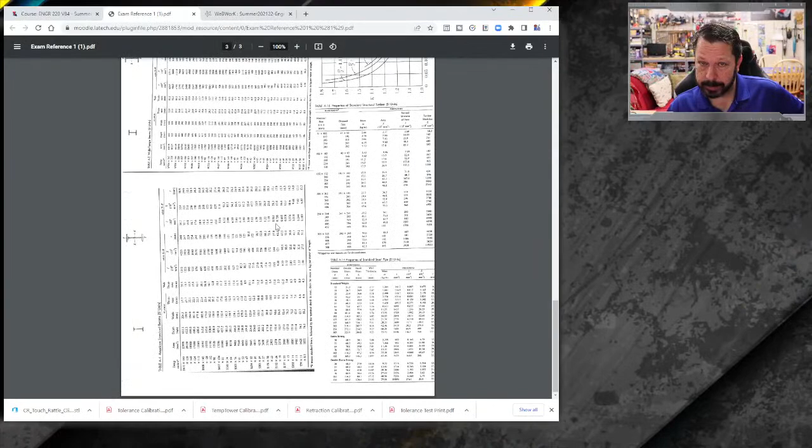One of the things you asked about was reference material. These PDFs right here are exam references. Most of this we don't need for exam 1 because these references are for exams 1, 2, and 3. So you might need this page right here.

Rotate the wrong way. But see, here's your material properties, so you can get your material properties you might need. You can use that exam reference.

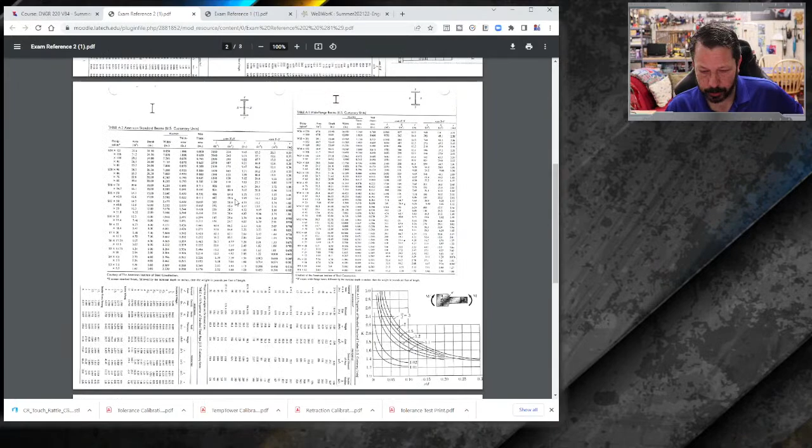Exam reference 2 is the same thing, just a different set of stuff. It has the centroids in there probably somewhere. There they are. So if you don't remember a centroid equation, they're all in there. But don't worry that a lot of this doesn't make sense, it's for later.

That's the reference material: exam 1 reference, exam 2 reference. Let's see what I put in here - this is practice for exam 1. I'm currently on class 10, the actual exam class.

Usually there's some old practice exams. Yeah, these are retired problems. If you want to see some old problems, not going to necessarily repeat these problems, but you can kind of see what some of the older ones look like. Now these are from 2006, 2007. I don't know how old this one is. Let's see what it looks like.

2009. So these are older test questions, but you can get an idea of the kinds of things that will be on an exam. These aren't necessarily complete exams, they're just pieces of exams. So you can practice with those also if you want more practice problems.

I don't know that those have answers. Some might not.

This is just reminding you that this optional 1 that we're going to work on today is going to give you extra practice for exam 1. Challenge 1 also does that, but it also gives you extra credit for homework.

You can also have a calculator, obviously. But other than that, you'll have your calculator, exam 1 reference, exam 2 reference, and the exam itself, and that's pretty much all you'll have. Paper to write on, and then you'll have your phone ready to take pictures.

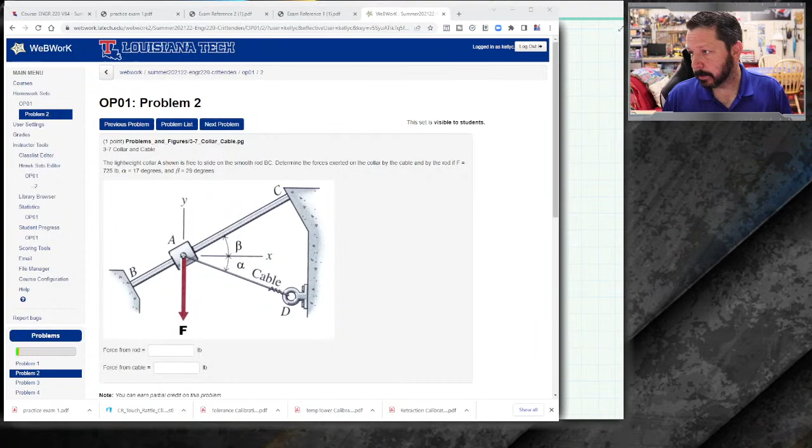All right, let's see, y'all can not see that. There we go. All right, so we've got this little collar. It says lightweight collar here, meaning we don't have to worry about the weight of the collar itself. Some situations that might be important, but lightweight is our key word that we can ignore the weight of it. It is free to slide on this rod BC. What that's telling us, the free part, means we don't have to worry about friction between the collar at A and rod BC. Determine the forces exerted on the collar by the cable, and by the rod if the force of this red arrow is 725 pounds, alpha is 17 degrees, and beta is 29 degrees.

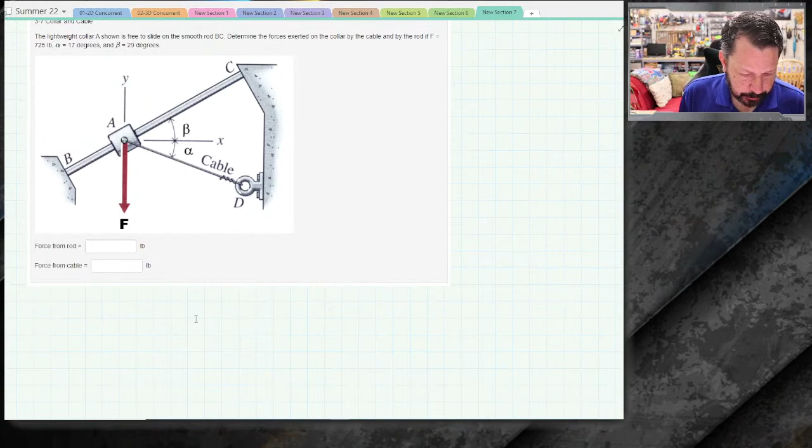So what we want to do with this is go down here and draw a little free body diagram. Actually, we'll draw it on top of here, and then we'll copy it down. We're basically wanting to worry about this little, what they call it, collar. And I'm just going to kind of draw the collar. And then the collar has this force F, which is 725 pounds for me.

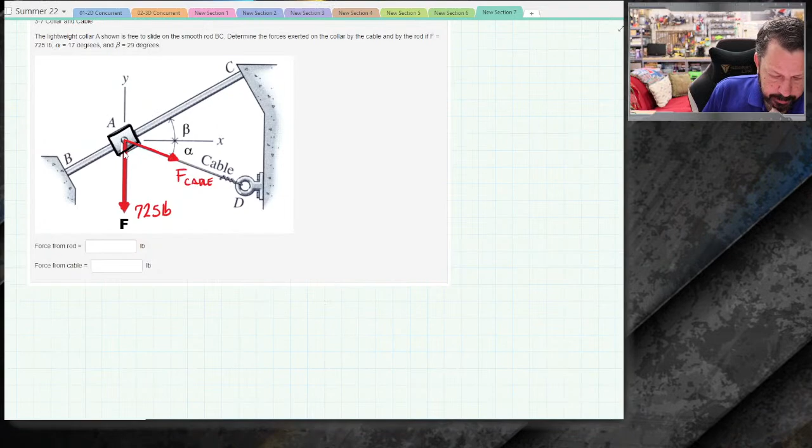It has a force from the cable here. We don't know that one, so it's just F cable. I'll probably call it FC in the end. We have a couple of angles here, so let's put a coordinate system right here at our origin. This one's a concurrent force system, so that's usually the best place to put it. In fact, there was already an X and Y axis there. We've got this angle alpha for me is 17 degrees. It's all getting cluttery, but we're going to move it in a second. Beta is 29 degrees. And the force between the collar - you have to kind of figure out what this collar is doing. It says it's free to slide, so there's no force in direction BC.

Collars, we haven't really talked about those yet. We talked about pins, we talked about rollers, but collars are a lot like rollers. The idea is that they constrain motion in one direction. So it's free to move in direction BC along this rod, but it's not free to move perpendicular to that.

When it means it's not free to move in one direction, that means there's something resisting that movement. So there's some kind of normal force here, we'll call it Fn, some kind of normal force inside the collar that's between the collar and the rod. We don't know what it is. In fact, it's called the force from the rod, so we don't know what that equals.

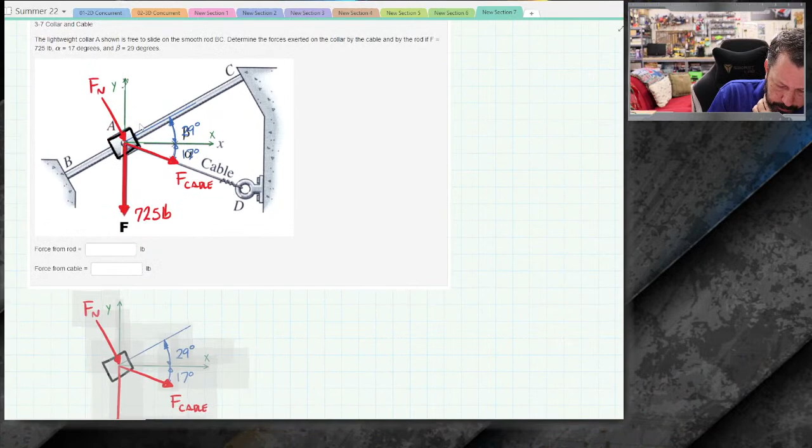Let's put another little line up here. I notice I've got to put that line, and so that's going to actually do more like that. Let's see if we can copy all of that little stuff. Move it down here. All right, so there's our little free body diagram that we're dealing with.

We have two unknown forces. I've got them kind of going in the same direction here, so that's not going to work. Something's going to have to give. Maybe I could fix that and move Fn to where it points up and to the left. That might be a good thing to do since it's obvious it can't go this way. If it's not obvious it can't go that way, that's fine, you just leave it. When you solve it, you'll just get a negative number and know you drew that arrow the wrong way. Now I've got something that pretty much looks like any other 2D concurrent force system that I've already solved.

So Fn is kind of unlabeled, but I do know it's the normal force between the collar and the rod. Normal meaning perpendicular, so I do know that this little guy is a 90-degree angle. So I know that this angle is 29 degrees, right, just based on the rod being rotated 29 degrees, so perpendicular to that has to be rotated 29 degrees also.

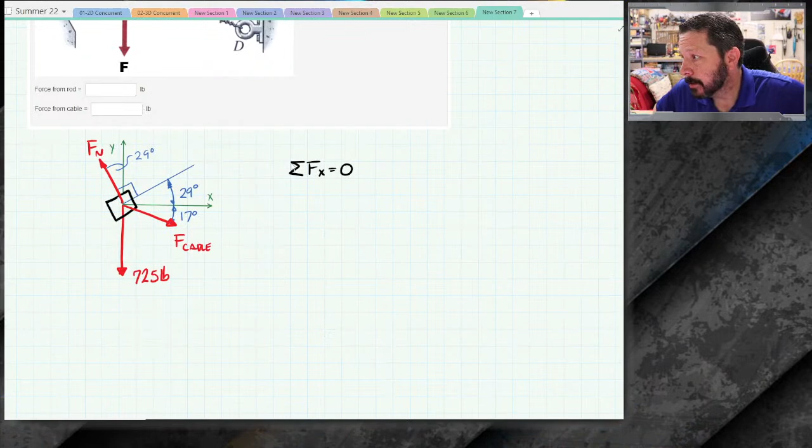Now I've got a simple setup where I can write some equilibrium equations. This is 2D concurrent forces, so I only have two equations, x and y. Both my unknowns have unknown values in x and y, so I'm going to have to write both equations and solve them simultaneously. For exam 1, I would expect that you're going to need to solve something simultaneously, either one of these 2D systems or one of the 3D systems, or both.

So you do need to have a way. You're not going to have MathCAD, even though you're on your computer, you only have Moodle. So you're not going to have MathCAD, and so you've got to use your calculator. Make sure you know an effective way to use your calculator to solve systems of at least 3 unknowns, because there's probably a 3D concurrent force system on exam 1. And there'll certainly be a 2D one, if not a 3D one, but I would expect to have a 3D one.

All right, so what this says is the force in the cable, times only the x component of it, so cosine 17 degrees, minus the force, the normal force between the collar and the rod, times the sine of 29 degrees, equals 0. I can't solve that equation, it has two unknowns, but I can write another equation.

In the y direction, because I have two equilibrium equations, I know this collar isn't moving in x or y. It's not translating in either of those, so these two directions have to add to 0. X has to add to 0, and y has to add to 0. I'm going to write them in the same order just to make it line up.

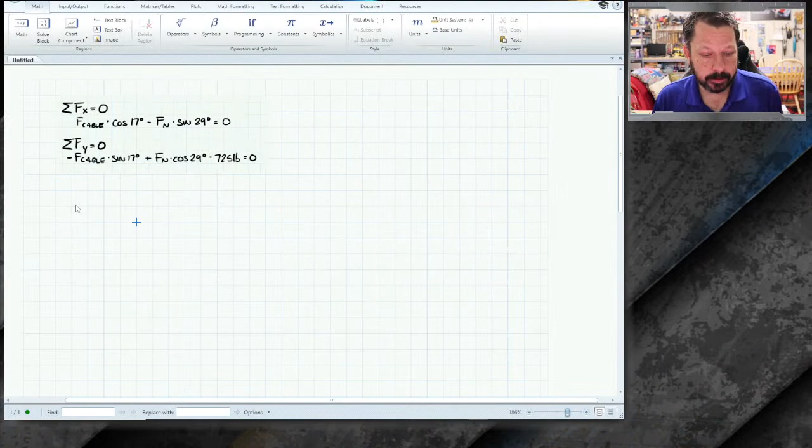What I'm going to do is copy this little guy right here. I'm going to go over to MathCAD. We're in MathCAD, paste it. It's going to be gigantic, we'll make it a little smaller, and we'll just throw this in a solve block and solve it over here. Again, not what you can do on exam 1, but you can do it other times.

I'm going to call this force cable equals 1 pound, and force n - I'm not using subscripts, it's just a lowercase n. Our constraints are that force of the cable times cosine of 17 - got to tell MathCAD that it's degrees.

Minus Fn times sine 29 degrees. Control equals all of this thing. Control equals, to do a symbolic equals equation, 0 equals 0. I probably need to put 0 pound force on that. I'm not certain about that, we'll see. Negative F cable times, sine of 17 degrees, plus Fn times the cosine of 29 degrees. All of that. When I move the 725, it'll become positive pound force.

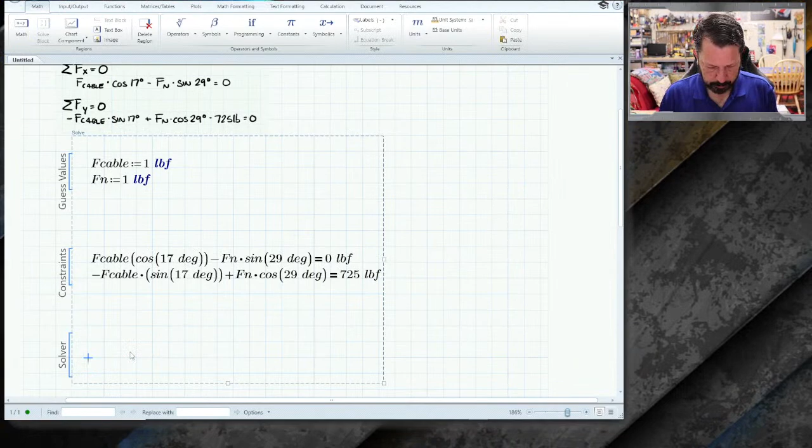Why are we having trouble? I just want to find F cable. Oh, do I have to do it this way? Answer 1 equals find F cable. Nope, what am I doing? I did Fn, I did those as symbolic equals equations. Did that, that's the problem.

Why do I have extra parentheses around these, I wonder? Keep typing it as a lowercase. Huh, not sure why it doesn't want to solve these. No solution was found.

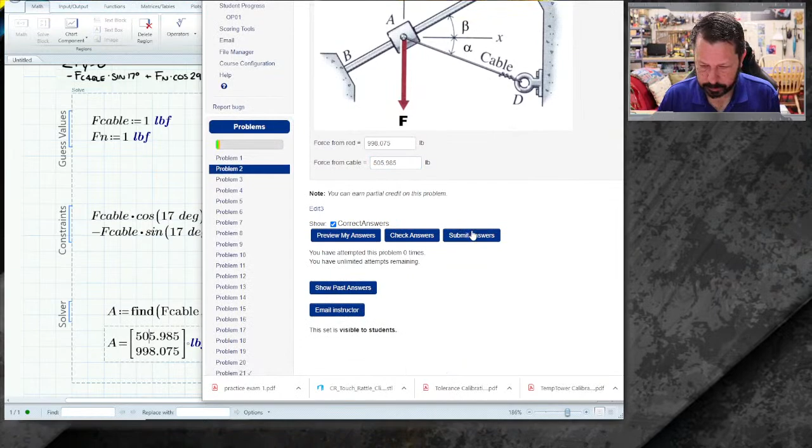I could definitely see this problem being something you would do as a medium level one. It's not like a one-liner, you've got a simultaneous set of equations. You got to draw this free body diagram, you got to think through. So this would be more of a medium level problem, not one of the easy ones.

But I could see this being a thing you could do on the exam as one of the actually a little bit tough problems because of the simultaneous equations you have to do. There's not another way to do it, and it takes a little bit of time to set up the equation, check it, do it, get it right. So I could see this one being on the exam, but one of the not hard problems, but upper level problems, something that separates maybe a B from a C. Maybe not one that separates an A from a B, but maybe separates a B from a C.

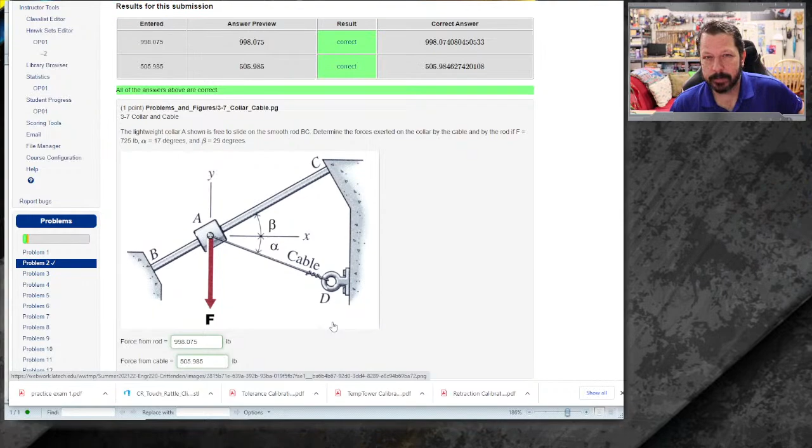It's just lengthy, and that's probably kind of the thing you can expect on the exam, is if there's a 3D concurrent force system, it's not that they're complicated, it's just that they're lengthy. And so they do count as one of the harder problems just for the length that they are. This would be a good one to work through. It says the same thing, the origin is over here, but the concurrent point is at A. So this would be another one.

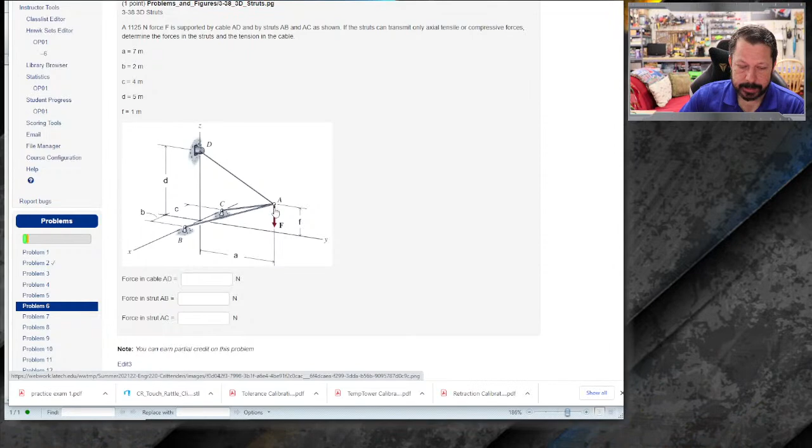If we have time at the end, we'll come back and do one of these, but they're a small portion of the exam, so I don't want to take a bunch of our time here just doing these. But if there's time at the end, then we'll go back and do this, but they're a pretty relatively small portion of the exam. So let's find, all right, this one's a good one. Let's copy this guy, and let's go to here.

All right, so here now we're in the mechanics type of stuff. This other stuff was all statics, right? So now this is in the mechanics stuff.

I've got two strips of plastic material, bonded together as shown. So the two strips they're talking about are this piece and this piece, and they're bonded together with these top and bottom pieces, maybe pieces of tape, just really thick, drawn pieces of tape.

The average shear stress in the glue - so the glue is on these pieces of tape. I'll try and draw it, but it's kind of on the top side, right here and right here. So there's glue in those green spaces between the top and the two little yellow plates, and there's also on the bottom, but I can't draw that without just coloring over where I already colored. But the shear stress in the glue is limited to 990 kilopascals, so that's your shear strength for this glue.

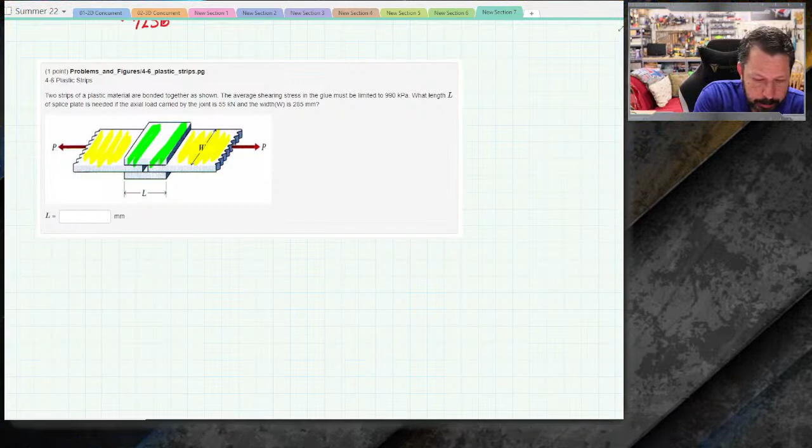What length L of a splice plate - so the splice plates are the two little plates on top and bottom, the ones in the middle - how much is needed if the axial load carried by the joint, that's P, is 55,000 newtons. And the width, they give us the width W as 285 millimeters.

This is a pretty good one. I don't think this counts as a super easy one, but it's pretty much on the separate a C from a D kind of level.

You do not have to draw free body diagrams to get credit unless the problem specifically says draw the free body diagram. It will help you, but it's not going to be graded unless the problem specifically says so. That being said, it's usually best to draw a diagram because if that problem happens to be one I'm looking at for partial credit, that free body diagram would be some of that partial credit. So let's say you don't know how to do the problem at all, but you draw the free body diagram correctly, and that's a partial credit problem I'm looking at. I don't look at every one of them as partial credit - some are too straightforward to really have partial credit. But if I see your work and like, oh, he's got the free body diagram correct, just didn't do the math right or didn't set up the equations, then you at least get something for it.

So here's what I'm going to do for a free body diagram. I'm going to take the little yellow piece on the right, and I'm just going to draw a side view of it. Let's just do this. Now this is larger than what they've drawn, but whatever. Here is the 55,000 newtons.

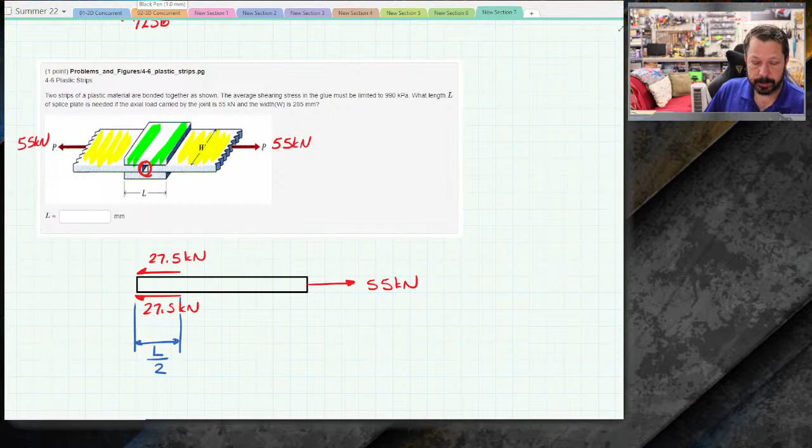So we do know it's a shear just based on the problem statement. Not every problem is going to tell you normal stress or shear stress - it's not going to always give you that clue in the problem statement. This one does, but make sure you know that you can look at a picture like this and tell that it's a shear stress versus a normal stress. You tell by looking at the force you're dealing with in your stress equation and the area that force acts on. If the force and area are perpendicular, then it's a normal stress because they're normal to one another. If they are not perpendicular, if they're parallel - which is how they're going to be in our pictures here - if they're parallel, the force and the area that force acts on, then it's a shear stress.

So I've got tau, that's shear stress, equals V, shear force, over the area the shear force acts on. They limit tau in the problem statement to 990,000 pascals. I'm going to do it this way so I don't get mixed up on my thousands somewhere.

Although my forces are in thousands of newtons also, so we probably could drop it off and it'd be fine. The total shear force is 55,000 newtons—that's 27.5 on top, 27.5 on bottom, added together. The area those two shear forces act on, there's two of them, one on top and one on bottom, so 2, and they have a width of L over 2.

And a thickness into the screen of 0.285 meters. So I converted everything over to my base units. You don't have to do that, but you might get confused and be off by a factor of 10 or 100 or 1,000 if you don't convert them all to the same correct units and you're not careful. So I just convert them all to the base units. All right, let's see if we can make this solve here.

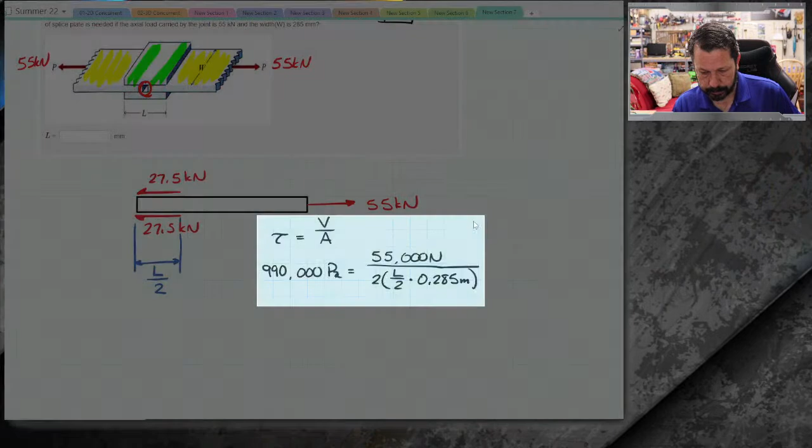L is what we want to solve for. Let's see if MathCAD can do that. I don't know. All right, so we'll just grab this guy. I wish MathCAD could just take the picture and figure out what I'm asking it, but I don't know that it can do that.

But we can put this equation into MathCAD with a symbolic equal sign. Newtons, whoops, over 2 times L over 2 times 0.285 meters.

Now, I'm not as good with this version of MathCAD, so we'll have to see. I want to do the solve. Maybe I need to do the whole equation. Well, it won't let me do that. Solve for L. Got a weird number here.

Newtons over meter pascals. All right, we have to figure out if that's the right set of units because that's weird. First of all, did I put everything? These are not the—well, that has units built into it. That's newtons, pascals. All right, so a newton, meter, pascal. Let's see if that's the right units because I want L to be in meters, right?

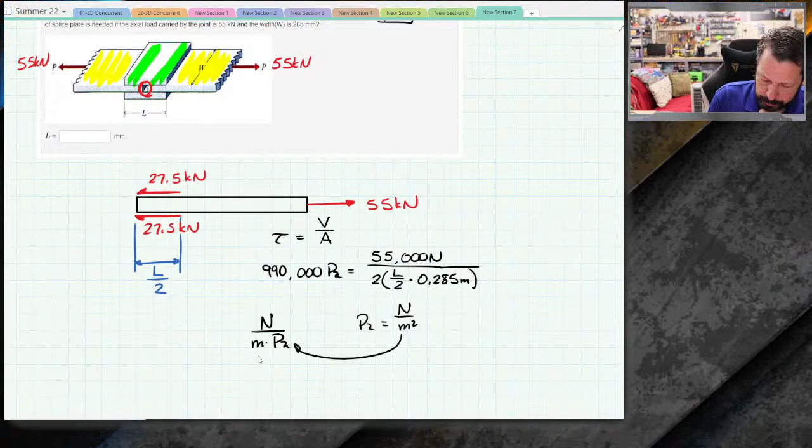So let's see, what was it? Newton over meter pascal. A pascal is, remember you calculate pascal as force over area, so it's a newton per meter squared. So if I have that plugged into there, then I have a newton over a meter times a newton per meter squared. Newtons cancel out, this cancels one of those out, and that turns into meter. So that is the right unit.

Not sure why MathCAD thought it was best to put it this way. So, 0.19493 meters. Let's find our little deal here, and this guy. All right, 0.1949 meters. It wants it in millimeters, so that's going to be 194.93, 94 for the total L, right? Yes, we got it right. All right, so that's a decent one for a simpler level problem, but not too simple.

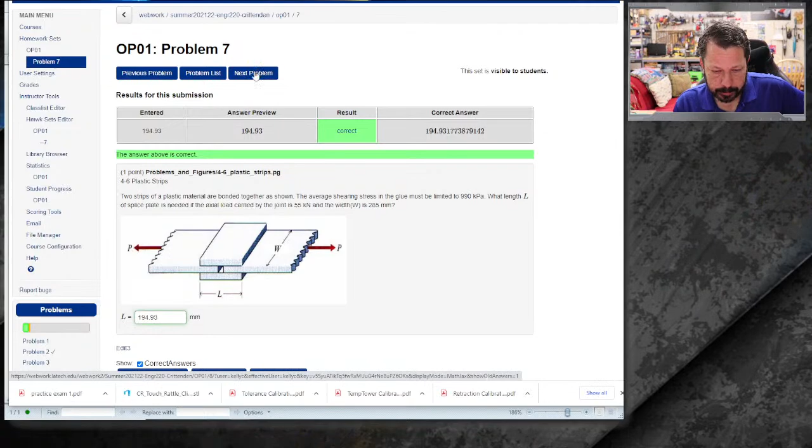There's a little bit of figuring out how to go about solving this one, but that would be kind of a design problem even, because you're figuring out based on your material strength, the strength of this glue, you're trying to figure out how much glue you need basically. So that's an interesting problem. Let's find us another one.

This thing, this one has a lot of good ones. I don't want to work through all of them, but this one, if you kind of want to practice all of your stress stuff at one time, go solve this problem because it's got all of your bearing stress, shear stress, normal stress, tear-out stress. They're all in this one problem.

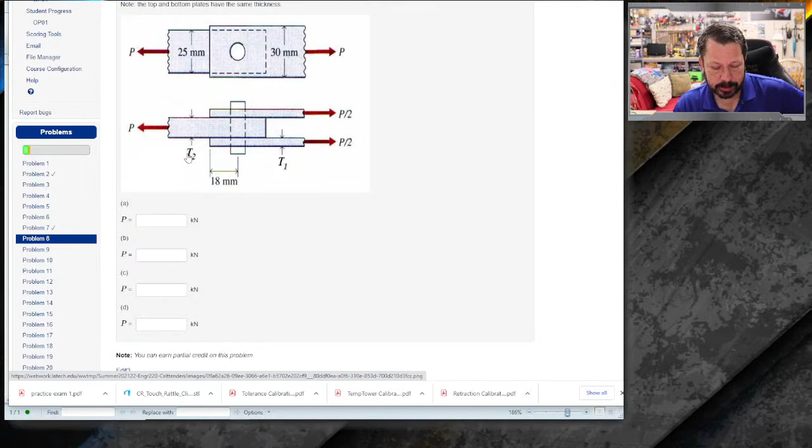So it is a good one to practice. This is optional problem 8. That's a good one. There won't necessarily be—I can't think if there is. I don't think there's a problem on the exam where you have one problem that has like a bunch of answers like this one. It would probably be broken into 4 different problems, but I can't recall if that's true or not on this exam. I'll have to look at it. I haven't looked at it recently.

Again, this might be one we come back to, but this would be a good one for you to practice. We basically did this one with the squirrels, right? We should do this one just because it's a different thing. This one counts as one of the pretty straightforward ones, but we haven't done this one or one like this, I don't believe, so we'll do one.

Also, where's today? Exam 1 review. I did an exam review last year where I did the same kind of thing, and I might have picked out different problems. So you can look at this one and see what problems I did back there, and it might give you even more review. I might have picked some of the same problems, though. I don't know, I surely don't pick them all exactly the same.

All right, so this one is a shear strain problem. I've got the rubber mounts, which are the pink parts on this picture. They're used to isolate vibrational motion. We're not worried so much about frequency of motion in this part, we're just thinking of the shear strain.

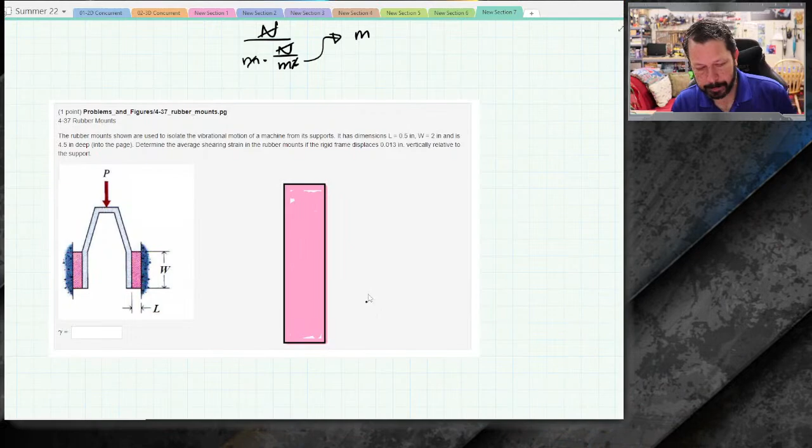Now it is attached to where it doesn't move, to a wall over here, so this side doesn't move. But the left-hand side of this thing is attached to this little upside-down U-shaped bracket, and it moves up and down. In our case here, we're looking at one instance in time where it's pushed down.

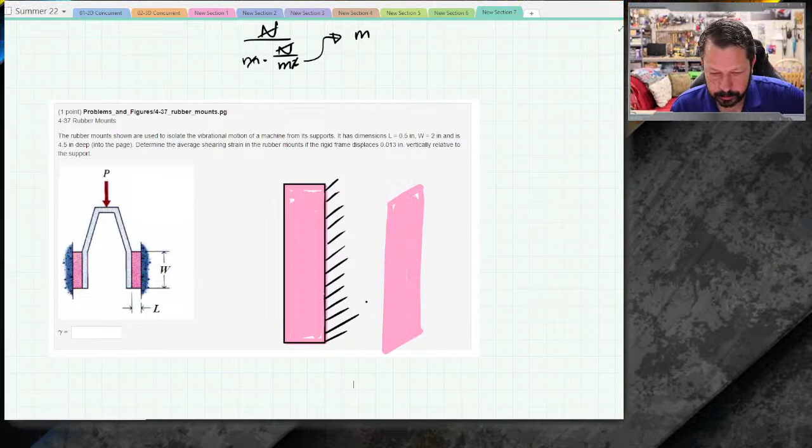So instead of this shape, let's draw another one. Where are those little pink... There we go, I don't know if I'll get this one very well, but this is the second state for it. It's kind of like this, and we'll try and do this. I don't know, no real point to it, I just want to do it. Oh, it goes that way. All right.

Want to... why can I not? There it goes. Oh, it doesn't let me skew it much. Oh well, that's no good, we'll just draw it by hand. So it skews over like this, and this part is still attached to the wall.

So the shear strain is that angle, gamma. That's all it's asking you to do, is calculate that angle gamma. And they tell you in the problem statement that basically this point moved down, for me it was 0.013 inches. They also tell me that this length is 1/2 inch. They also tell me W, but I don't need W.

So to calculate gamma, it's just tangent of gamma equals the opposite side, 0.013 inches, over the adjacent side, 0.5 inches. The inches cancel out, and I just calculate gamma. I can just do this math directly: 0.013 over 0.5, so it's just twice that, because we're dividing by half. 0.026, no units. And if I did the actual tangent of this, the tangent of 0.026 is pretty much 0.026.

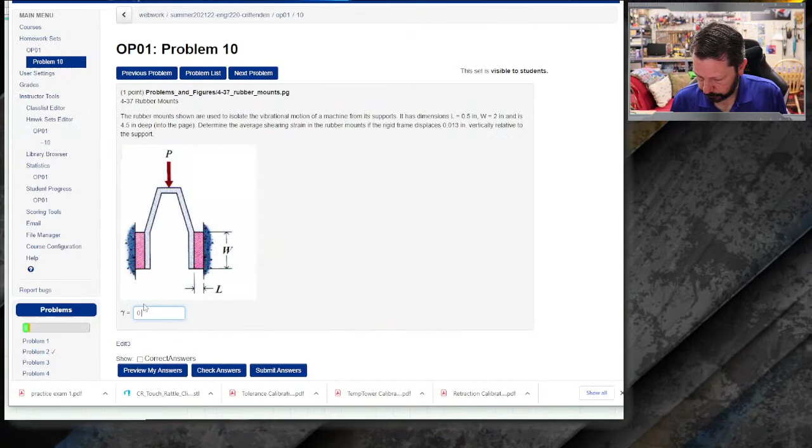Hopefully we did that right. Yes, we got it right. This one would be one of the simple problems. So all of this drawing and everything, you could quickly sketch that out if you needed to. But all you're trying to do really is deal with this little triangle. It doesn't matter either, they're the same triangle. So you're just trying to figure out the angle gamma right there. So those are really straightforward. There could be one on exam one, it's possible, but they would be ones I'm expecting you to look at and spend a minute or two on and be done.

Oh, this will be a good one to work. Now this one's got a lot going on, but this probably is worth doing this whole thing. All right.

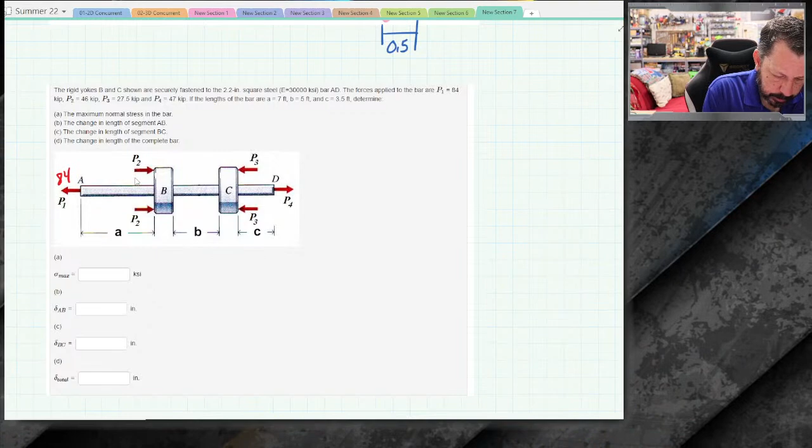So let's put our numbers in. We've got 84. These are all kips - I'm gonna leave off the kips because it's gonna get really cluttery. We've got 46 here, another 46 here, 27 and a half here, 27 and a half here, and 47 here. Okay, we have lengths: 7 feet. It doesn't give me the thickness of B and C. We're assuming it's negligible, or it's not part of what we're trying to do. It's so much bigger than the square bar that it doesn't really change length much. So B is 5 feet and C is 3.5 feet.

And the first thing it wants me to do is, what is the maximum stress anywhere in this bar, sigma max? So I've got 3 distinct sections, ignoring the blocks at B and C. They don't give us any dimensions or materials or anything about those, so we're going to think that they're pretty much not changing length - not stretching or compressing. So only section AB, section BC, or section CD of the square bar are what I'm interested in.

So let's do this little guy. Cut it open right there. That free body diagram - well, it's square, but I drew it kind of as a round bar. There's the external 84 kips, so inside that one, there's 84 kips right there. That might be the biggest one.

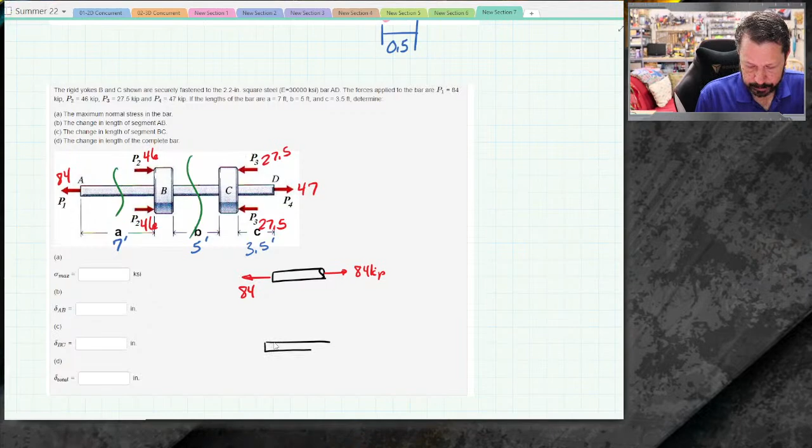Let's cut open BC, draw that free body diagram. So I'm going to start at that same location. There's B, which we're kind of ignoring, and then there's where we cut it open. So we've got 84 here, 46 here, and 46 here. Need my calculator. So that's 92, minus 84 is 8. So I need 8 kips going this way to balance that. So I have 92 pushing to the left and 92 pushing to the right. So there's only 8 kips in that section BC - that's way less than 84.

So still AB is our section that has the highest force in it. And then let's do CD. The easy way to do CD would be to draw the right-hand side - just draw this little piece. And inside there, I've got 47 there, so I must have 47 here. So yes, section AB has the highest force.

Does it have the highest stress? In this case, it will, because they all have the same cross-sectional area. Now, if they had different sizes - the material doesn't matter for stress, at least as far as we're doing things - but if they had different sizes, like section AB was really big compared to section CD that had a much thinner cross section, then yeah, maybe CD does have a higher stress. But they all have the same.

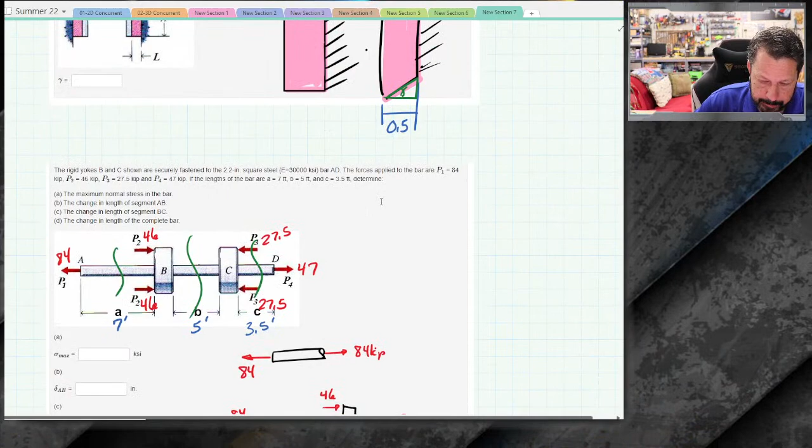The problem says it's fastened to the 2.2 inch square steel bar, AD, so the whole bar is the same size. So we can calculate the stress in section AB equals the force in section AB divided by the cross-sectional area of section AB. I guess I could label this: this is AB, this is BC, this is CD.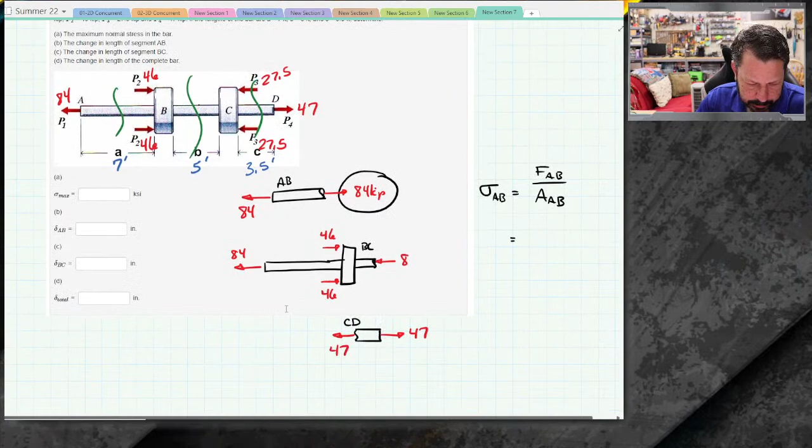The arrow for that one is pointing away from the free body, so it's a tensile force - it's stretching out section AB. I don't think this problem tells us to use positive and negative for compression and tension. Doesn't look like it does, so we're just going to calculate stress. 84,000 pounds - the area, it said it was 2.2 inch square, so what that means is it's 2.2 inches by 2.2 inches. It doesn't say tube - if it said tube, we'd have to figure out how hollow it is, but bar, rod, stuff like that means it's solid. So this is a 2.2 inch on each side solid piece of metal. The area is 2.2 inches times 2.2 inches. So that leaves our stress to be calculated.

17,355.4 pounds per square inch, so that's PSI, or 17.35, let's do 17.36 KSI. Let's see if WebWork likes that. Oops, 17.36, I don't know how many decimals. I did round some there, so it may not like it. Nope, it's fine with that. Okay.

Now the next little piece. Again, you will have problems like this on the exam. It probably won't be that there are 4 individual questions about one problem. I might give you one picture and then ask individual separate questions about it, so each one can be correct without you having to get the others right, so they're not cascading with one another. Like you make one mistake in part A, then you automatically miss all the other parts.

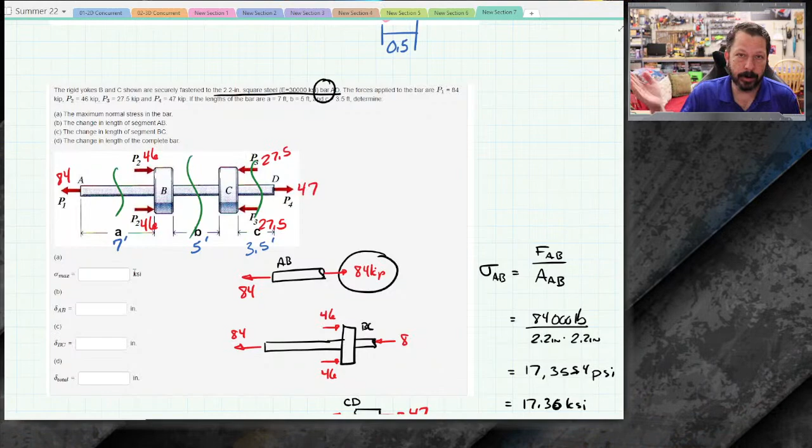All right, so delta AB, that's the change in length of section AB. It is going to matter here if they're positive or negative, because positive is going to mean it's stretching, negative is going to mean it's compressing, getting shorter. So the force in AB times the length of AB, divided by the area of AB, times the modulus of elasticity of AB.

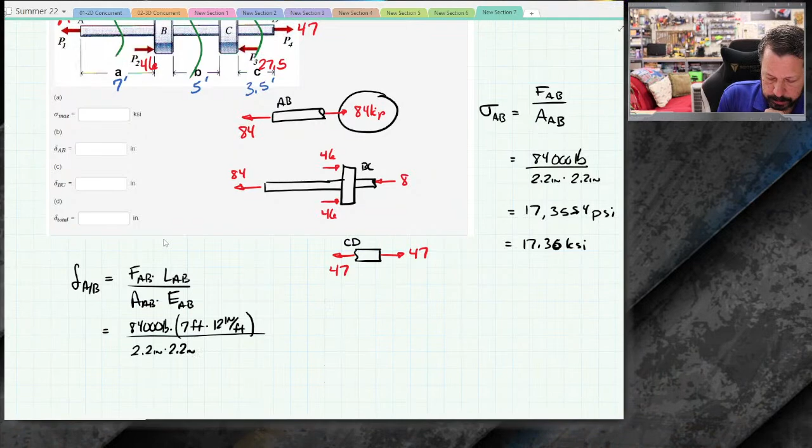So the force in AB is a positive 84,000 pounds. The length of AB is 7 feet, 12 inches per foot, so that I have inches in that part. This is pounds. The area we just did 2.2 inches times 2.2 inches. That's the area. The modulus of elasticity, sometimes you'll have to go find these reference sheets.

Which one? That one, and look up the modulus of elasticity over here. So it could be that you have to do that. This particular problem gives us right here, E equals 30,000 KSI, so 30 million PSI.

So all of these units should cancel out except for that inch right there, and we'll have our units in inches. If you forget and don't convert LAB from feet to inches, you're going to get some weird numbers here. So make sure you get your conversions done right.

So 84,000 times 7 times 12, divided by 2.2, divided by another 2.2, and divided by 30 million. 049. Positive, because the 84,000 pounds was in tension, so it's getting longer.

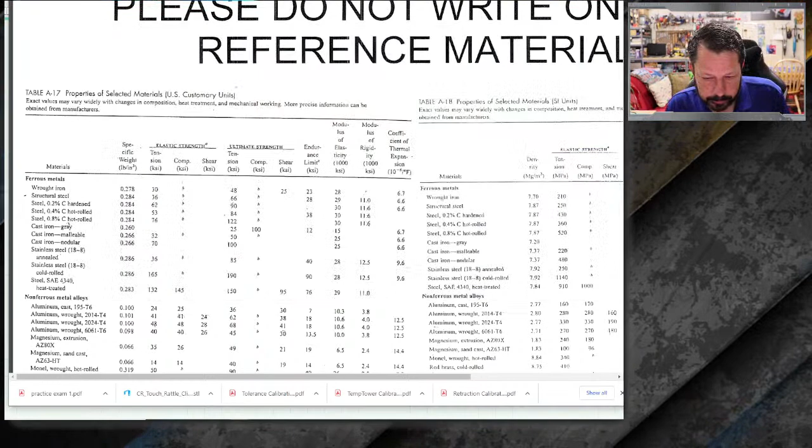Let's see, where did WebWork go? I think it's right here. Oh well, all right, so this one you would get right on the exam, but it's actually .04859. I put .049, so it doesn't like that. I need more decimals.

So, 4859504. Now it's happy. All right.

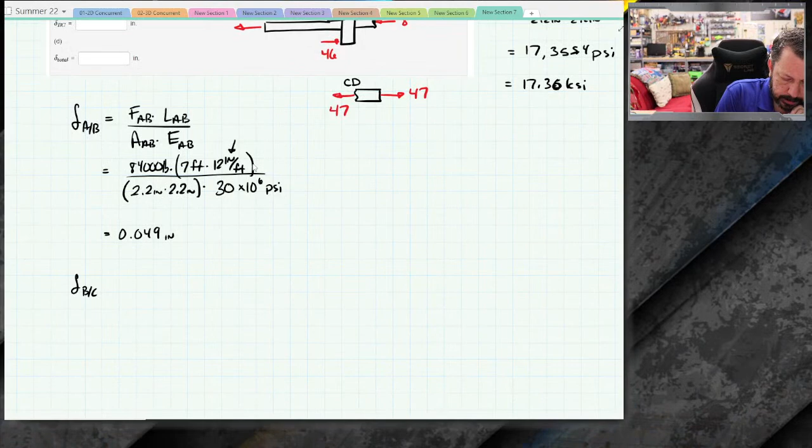Well, let's go back to here. Delta BC, this one is the change in length of just section BC. So delta BC is the force in BC times the length of BC, divided by the cross-sectional area, which is the same, and the E, which is also the same, because it's the same material, same size, so the denominator doesn't actually change. So the force here, you got to look at that one.

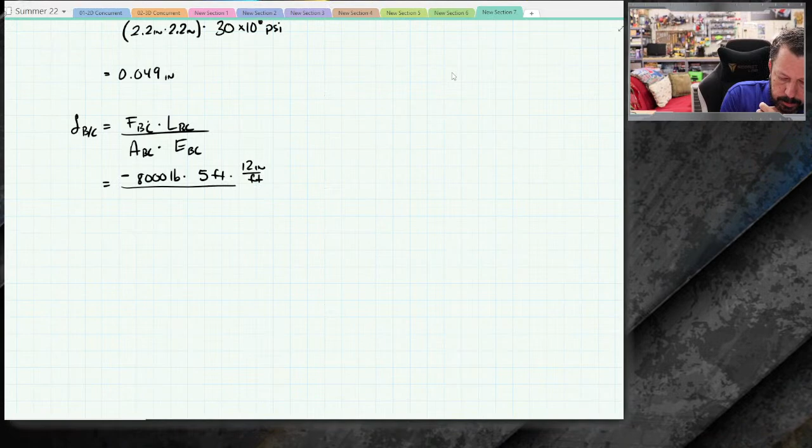That's this force. That arrow is pointing towards my free body, so it's a compressive force. So this is actually minus 8,000 pounds. It was 8 kips. The length of BC, I think, was 5 feet, times 12 inches per foot, divided by this same stuff. I should have saved that. It was 30.

So this one's going to come out negative, it's getting shorter. It's going to be a small number, though, because it's a shorter length and a much smaller force. And let's definitely put more decimals with that one. I think it was 0. That's 0.00330579 inches. See?

So we need the negative. And it likes that with that many decimals.

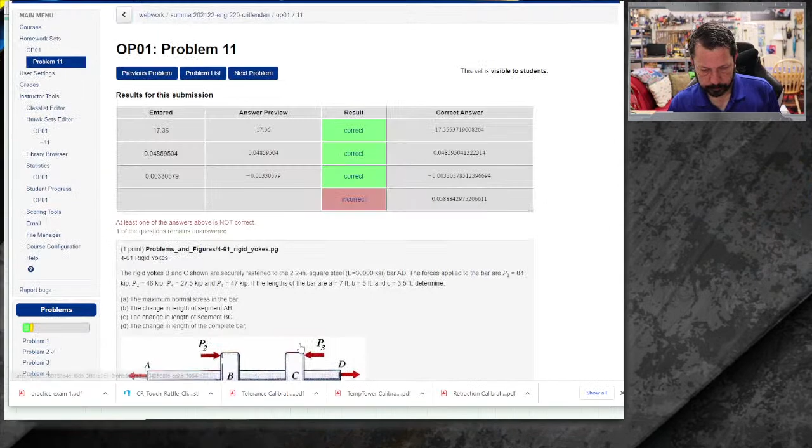The last part here is delta total. So to do that one, I'm not going to do that one, I think we've got the point on this one, we can move on. But to do that one, we would also need to calculate the axial deformation in CD using that 47 tensile force right there, and then add up all of these deltas. So we'd add the 049, the negative 0033, and whatever we got for CD, add them all together, and that would be the total change in length for the whole piece. All right, so there will be something, again, maybe not 4 pieces to one problem, but there will be one of these axial deformation problems on there, for sure.

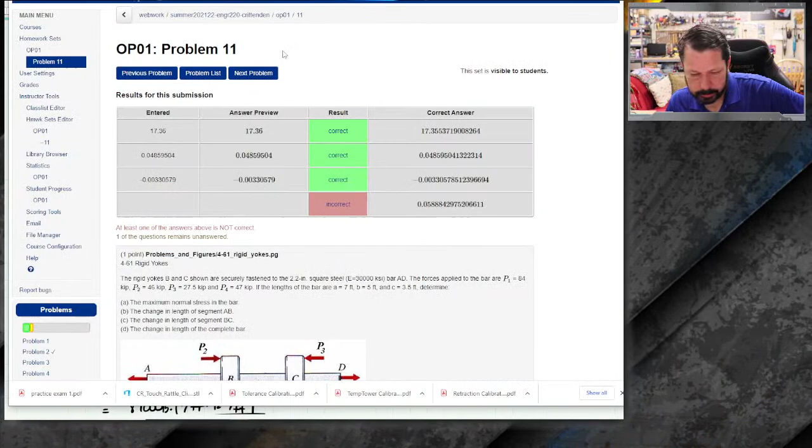All right, let's see, we've got plenty of time. Let's just make sure there's no questions over here. Nope, don't see any. All right.

So that's pretty straightforward. This one, I could see something like this being on the exam. It would be one of the more simple problems, though.

This one's a tricky one. I'm trying to decide - this one's kind of tricky and not really the point. I don't like tricky questions on exams, that's more for homework, just to work through it. I don't want you to have to learn stuff on the exam, I want you to demonstrate the things you have learned. This is a good problem, probably not a good exam problem, because it takes a decent amount of time to set up all the equations. This would be good to practice to make sure you really understand axial deformation, but I'm not going to work through it since it's not quite representative of an exam problem.

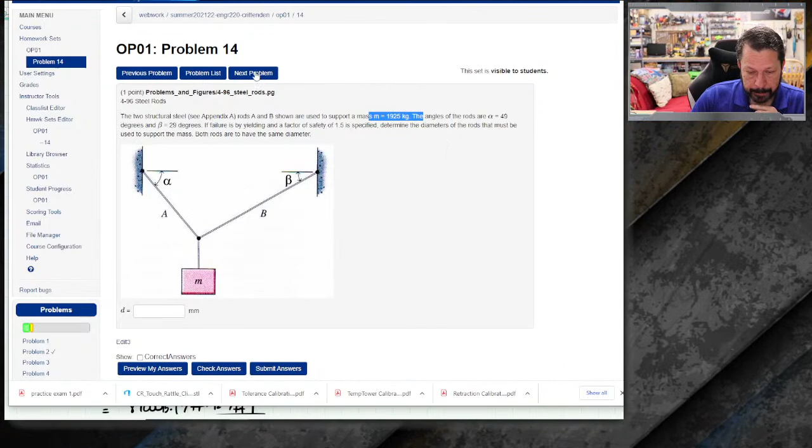I wouldn't worry with this one. This one's a good problem, not a test problem - it's kind of like that one I talked about a few problems ago.

This one there might be something - it's pretty simple, but there could be something like this on the exam. So just in case, let's work through it. That's MathCAD, we don't need MathCAD right now.

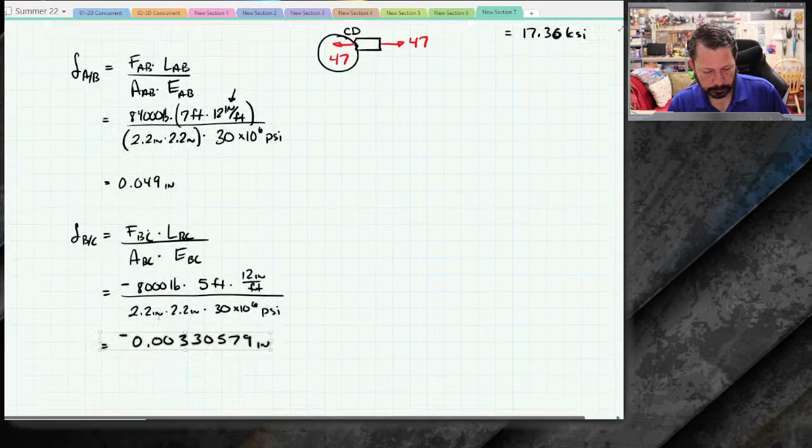All this one's trying to do is get you to calculate moments. You've got two forces, F1 and F2. Sometimes I put a problem like this with two forces, sometimes there's a force at some angle and you figure out the two components. But the idea is you've got some number of forces and some labeled point - in this case the point is O, down here - and you want to calculate what moment these forces create about point O.

This particular one is asking for two things: what moment does force F1 create about point O, and what moment does force F2 create about point O. This problem doesn't say to use clockwise or counterclockwise as positive. So if they don't tell you, if it's multiple choice, the answers could have CW or CCW on them, or it could just want the magnitude of the moment. So this one would be M1. Force 1 is 8 pounds.

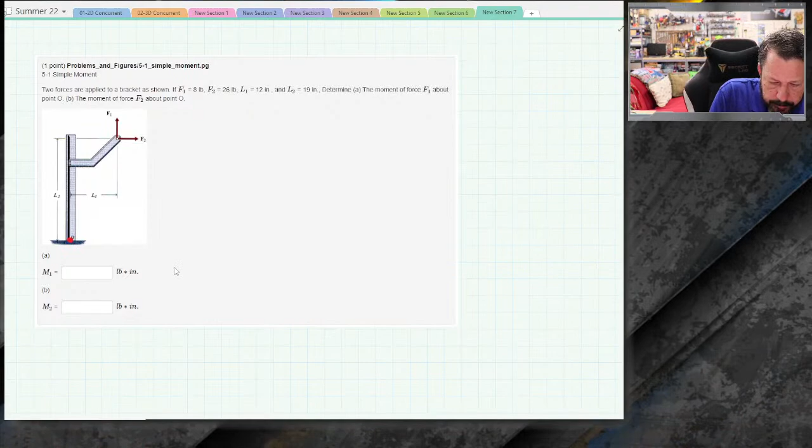L1 is 12 inches. The units the problem wants are inch-pounds, so M1 equals F1 times L1. Force 1 is a vertical force, so I need a horizontal distance between this line of action and point O - that horizontal distance is labeled L1. So all you have to do is 8 pounds times 12 inches, and that's your answer.

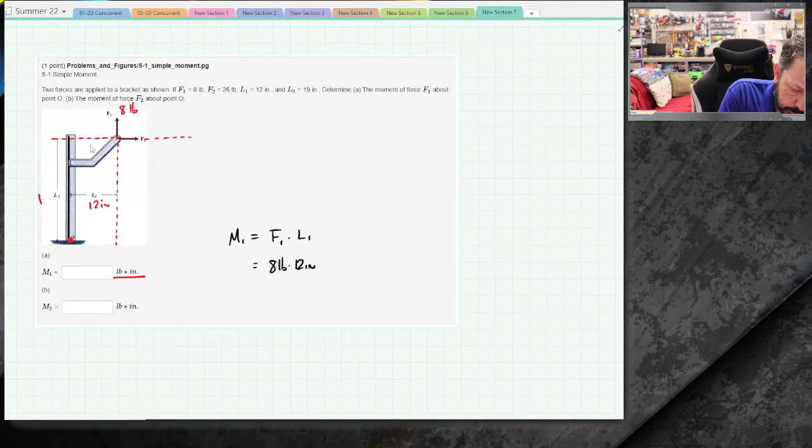M2 has a horizontal line of action. The vertical distance between that horizontal line of action and point O is labeled L2, which is 19 inches. F2 is 26 pounds, so M2 equals force 2 times L2. Sometimes you have to break forces into X and Y components, but in this one they're already in X and Y. So it's 26 pounds times 19 inches.

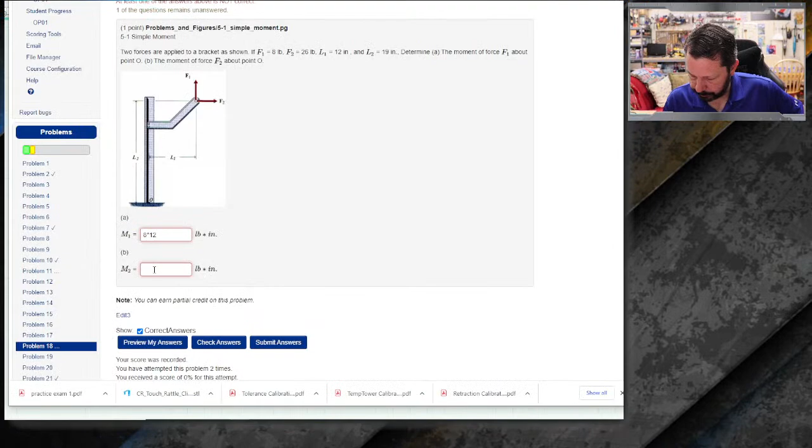We should be able to just plug those numbers in. I wonder if I can do 8 pounds times 12 inches... no, it doesn't know that. So it's got to be 8 times 12, inch times pound. Well yeah, it already has the units - I just need to do 8 times 12 and 26 times 19. That's what it wants. There we go.

There are questions like this one, but typically the force is at some angle, and you want to find the total moment that angled force creates about some point O.

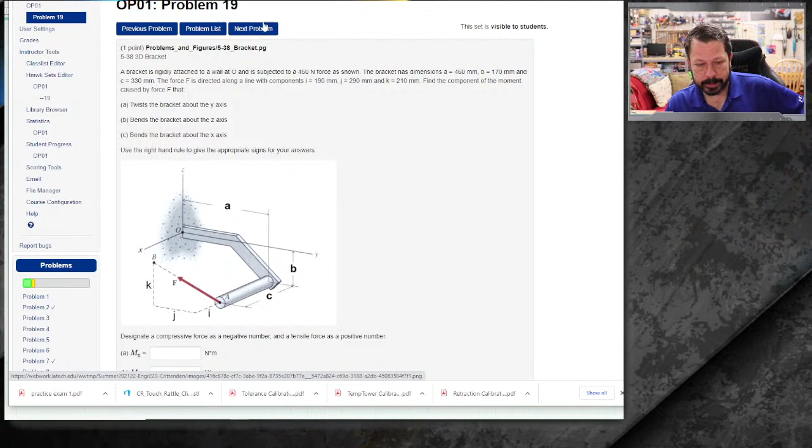This one's a good one to practice with, but I don't believe there are three-dimensional moments on exam 1. This is a good thing to be able to do, but not for exam 1 - they just take too long. Same thing with this one, a centroid by integration - good to know, but they take too long and they're a little fiddly if you don't know how to integrate this ellipse. So that's something to be familiar with, but not for exam 1.

We did this one, didn't we? I think we did this, or at least part of it, so that's not one we need to work. There definitely is a centroid problem on exam 1 - let's do this one, we haven't done this one.

Find the x and y coordinates of the centroid of the shape. They've already given a reference axis for this exam problem, so you have to work with that one, or at least translate your answers back to that origin.

It looks like I've got 3 parts here: 1 solid half circle, a negative triangle, and a negative square.

Let's label our dimensions. R is 140, and these are all millimeters, but I'll leave the units off to save room. C is 74, A is 80, B is 75, so that's not a square, it's a rectangle.

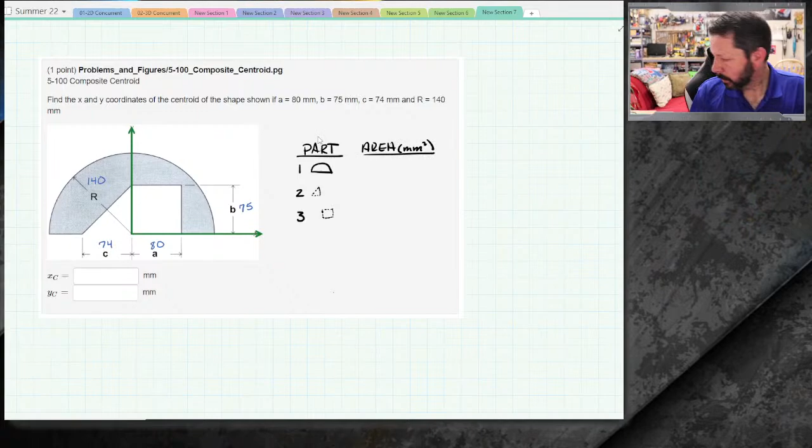The area of the half circle, I have a radius, so let's do pi r squared divided by 2. Radius is 140, and we want to divide by 2 because it's only half of one. That number is huge for millimeters, but I guess we'll go with it.

30,787.608. The triangle is 74 times 75, also divided by 2 because it's a triangle, but it's negative: 2,775. Then the rectangle, 80 times 75, and that's just what it is, but it's negative 6,000.

So our total area is, we just add all this stuff up: 30,787.608, subtract off 2,775, and subtract off another 6,000.

22,012.608 millimeters squared. Okay, now let's do y sub c.

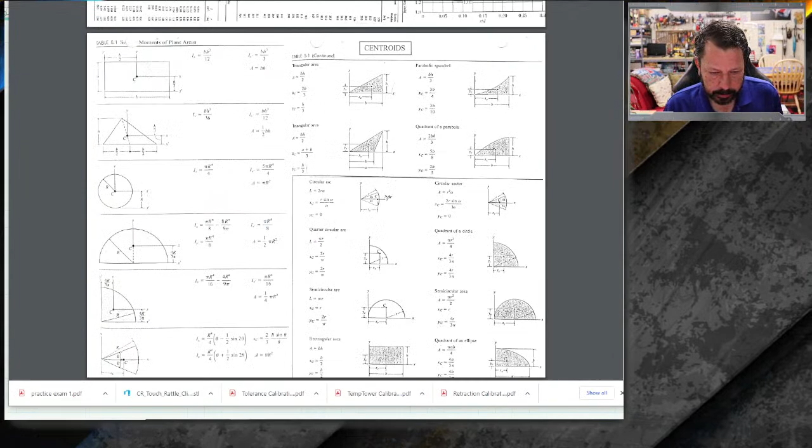So you got to go to your reference material. Here they are right here. Let's zoom in. Make sure you're not using the arc - the arc is like a rope or a wire, it's not solid, so make sure you're using the solid, the colored in one.

It says y sub c, that's the distance I need right now, from the bottom up to the centroid, is 4r over 3 pi. So 4 times r over 3 times pi, and let's see what that equals.

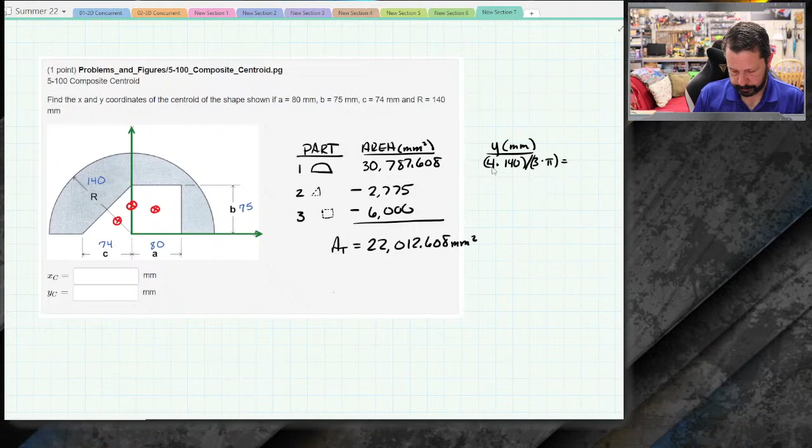59... does that seem reasonable? Yeah, it seems reasonable. 59.418. Now the triangle.

That one I do remember, but if you don't remember, where's the triangle? Here it is - from the centroid down to the bottom. Sometimes you have to reorient the triangle in particular, but it's basically 1/3 of this longer, the straight side. So 1/3 of 75 millimeters, so 25 millimeters.

The square is right in the middle, so that's just 75, but divided by 2, so 37.5. Now let's just drop down - A times y.

So our area, 30,787.608 multiplied by 59.418... 1,829,338.092. This is part 1, part 2, part 3.

Part 2 is 2,775 negative times 25, so negative 69,375. Part 3 is 6,000 times 37.5, negative 225,000. And then we'll have our summation here.

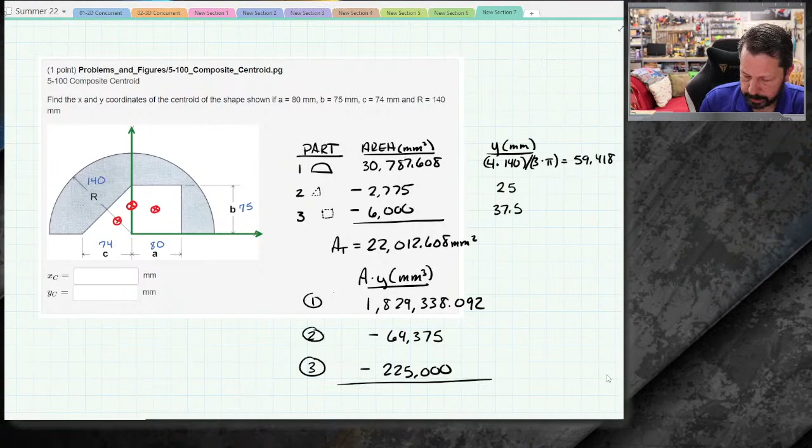1,829,338.092, subtract 69,375, subtract 225,000... 1,534,963.092 millimeters cubed. And y sub c should be summation of A times y over A total.

I'm not going to write those numbers again, I'm just going to use them. That number, 22,012.608... 69.731 millimeters. Let's look and see if that kind of makes sense.

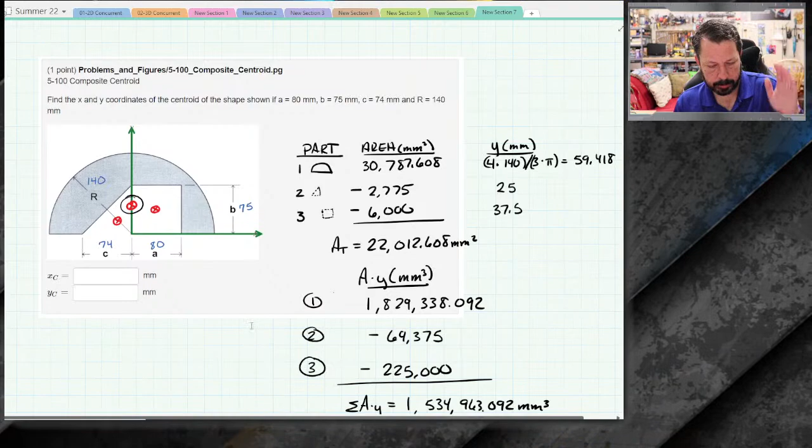Yeah, it kind of does. I just kind of guessed where to put this thing, and that's more or less where it is. Well, that's the centroid for the half circle - this is the centroid for the entire thing, which should be even further up. So that kind of makes sense. All right, so let's try 69.731 for y sub c.

Now again, WeBWorK - oh no, we actually got it right. We were off in the thousandths, 2 ten-thousandths of a millimeter.

To get x, we would do the exact same thing, except we'd have to do the x coordinate. The one tricky thing there is the x coordinate for the triangle is actually negative. The x coordinate for the half circle is 0. And the x coordinate for the square is just 40, so it's really straightforward. The one tricky part is making sure you put that distance in as a negative 74 over 3, one-third of 74. Again, this is another one of those problems where you probably don't have to do X and Y. I just give you a picture and you do one of X or Y, whichever I tell you.

Let's see what else we have in here. Oh, distributed loads. We didn't really talk about distributed loads. Let's do this one because we didn't talk about it. It's possible that it's just a centroid, but since you haven't necessarily seen a distributed load very often, or maybe at all, it would be good to look at this one.

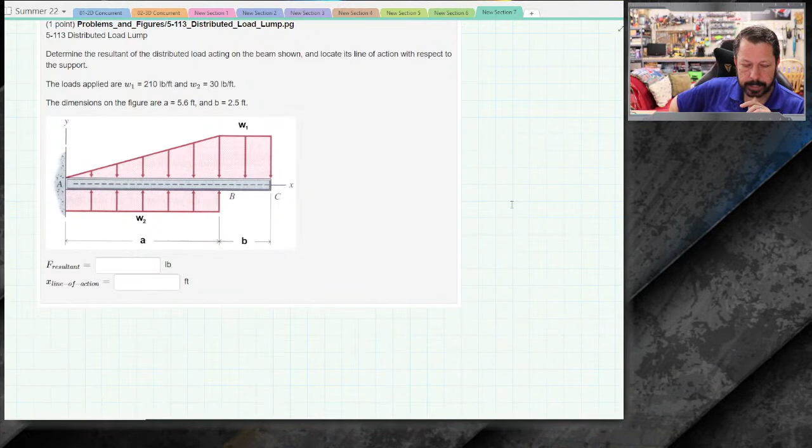So what this is doing is these pink arrow area region things are trying to show you that mostly we've been doing these point loads, like an 8-pound load that's pulling straight up. But sometimes you have loads that are spread out, and you really can't look at them as a point load, so they're distributed. We have two different types of distributed loads here.

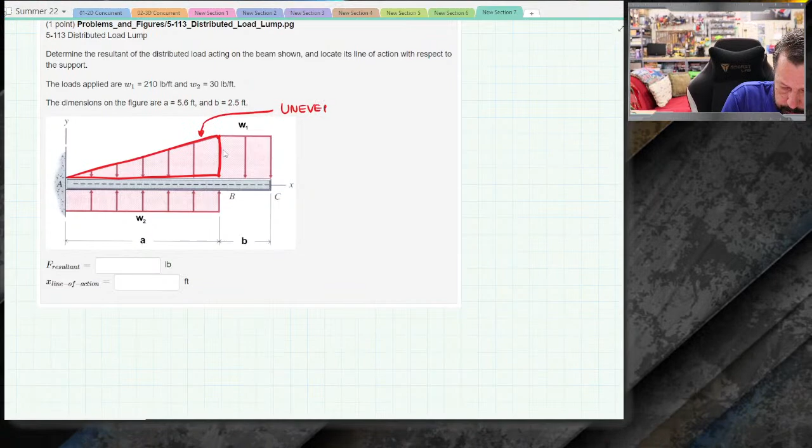We've got this one, which is unevenly distributed, and that could mean a lot of things. In this case, it's kind of just a linear slope going from 0 force, whatever the force is, pounds per foot, up to 210 pounds per foot. So it just varies between those two.

And then obviously the ones that look like rectangles are evenly distributed loads. So what you want to do, sometimes when we're working on problems, particularly stuff we'll do after exam 1, for solving maybe a moment equation, we want to be able to lump these distributed loads into a single point load. I want to find where I can put one big point load that has the same effect moment-wise, that creates the same moment about point A as all these distributed loads. So that's what this problem is asking you to do.

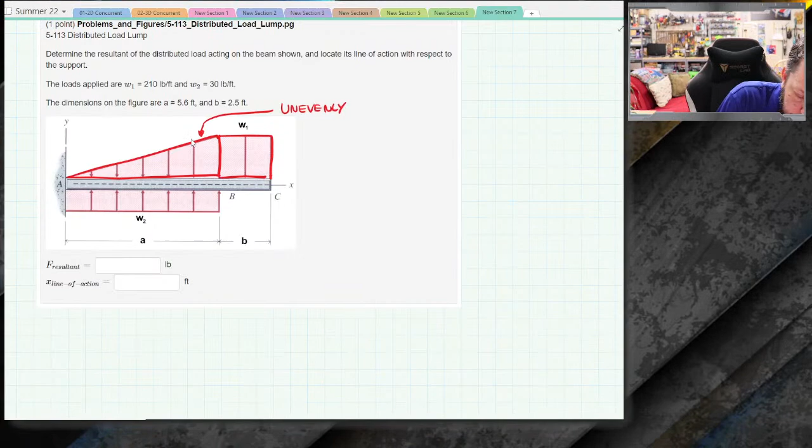F resultant is just basically calculating the total force. So let's back up a little bit and treat each of these - they are forces, but we're going to treat them like they're just areas. So this force, or this distributed load, creates some force here. That force is just the area of this triangle.

So A is, for me, 5.6 feet. And B, we'll need it in a minute, 2.5 feet. These heights - the height of the triangle kind of represents the magnitude of it, but they have weird units. So the height of W1 here is 210 pounds per foot. If we look at just the W1 box, just that piece, it is 210 pounds per foot tall, and it's spread over 2.5 feet. So that represents one force that is 210 times 2.5, 525 pounds.

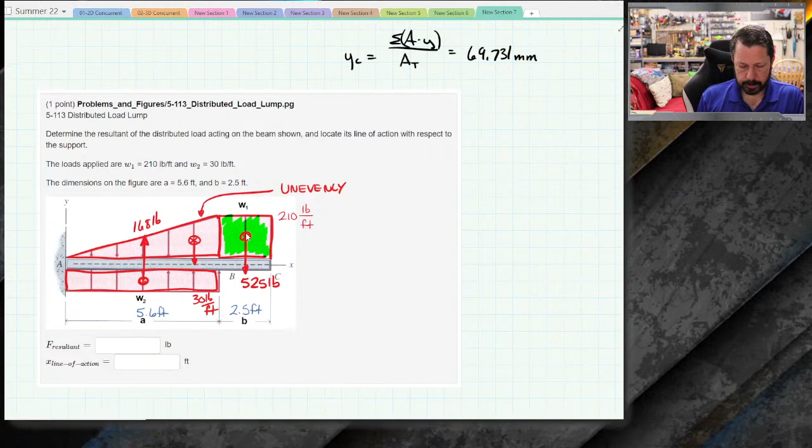Same thing over here, except it's going up. This one, W2, is 30 pounds per foot, but it's spread over 5.6 feet, so it's a total of 168 pounds pushing up on the beam. The unevenly distributed one, the triangle one, is the same thing - you just have to remember to calculate the area of the triangle. So the height of this triangle is 210 pounds per foot, spread over 5.6 feet, but it is a triangle, so I now have to divide by 2. That gives 588 pounds.

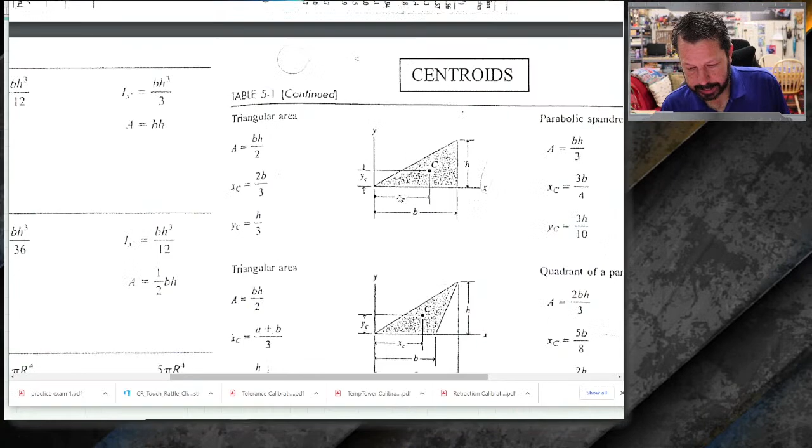I want the distance from the centroid. That's where, when I was drawing these at 525, 588, and 168, I put those forces at the centroid of each individual shape. So the 588 is at the centroid of the triangle, at X sub C, 2/3 of the base. This arrow is 2/3 of the base of the triangle, which is 5.6 feet.

So it's 5.6 times 2 divided by 3. That gives 3.733 feet.

The 525 pounds has a moment arm all the way back to A of 5.6 feet plus 2.5 feet divided by 2, so 1.25, giving 6.85 feet. Minus, because the 168 arrow is pointing upwards, creating a counterclockwise moment, and that one is just half of 5.6, which is 2.8.

So what this says is that the left-hand side, 945 pounds, which is all these distributed loads added together, times X, is creating the same moment that each individual distributed load creates about point A. So the only unknown in this equation is X, and I should be able to solve for it.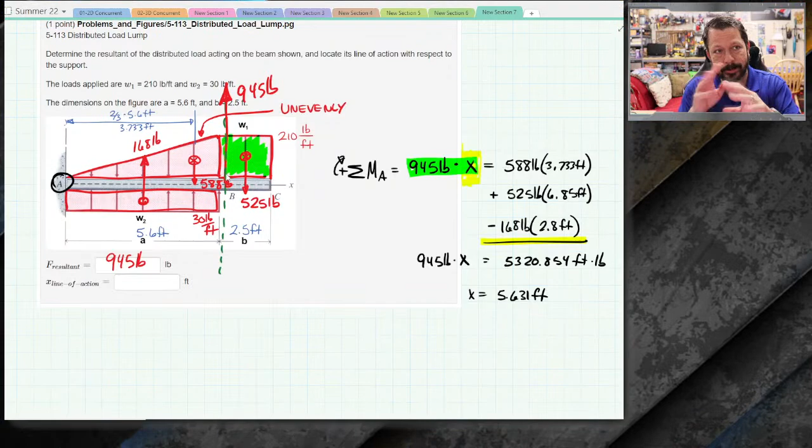It doesn't bend the beam the same way, but it helps at the early part of some calculations if I can figure out the net effect of a bunch of distributed loads and lump them into a single point load. I can do calculations with that, particularly when summing moments and things like that.

5.631, let's make sure that's right. Yes, it's in feet. Do be aware of the units in the problems on webwork, but also on the exam, because sometimes the units might be shown as something you calculated in inches, but the units are feet or whatever.

Let's do this one. Do we have time? Yeah, we have time. We don't talk about pulleys very much, but they are a static problem that's pretty straightforward. I guess that's why I don't talk about them, because they're really pretty straightforward.

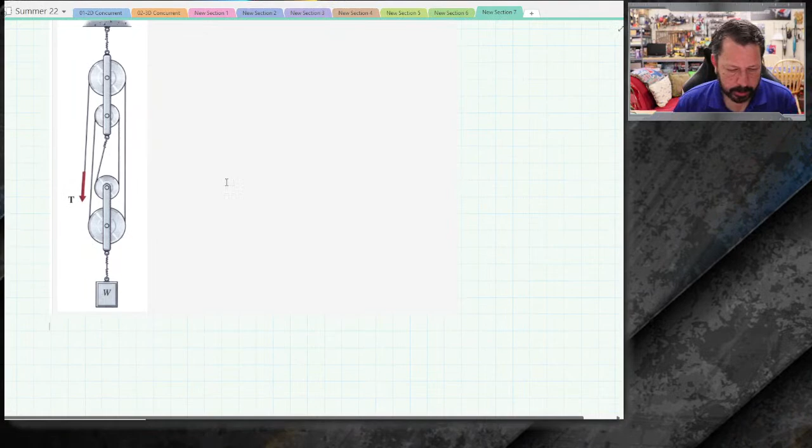A couple of assumptions with pulleys: it says right here, free to rotate, and the rope is continuous over the pulley. Those are two clues. Free to rotate means there's no drag on the sheave, and we're also assuming no friction between the rope and the sheave. The sheave is the pulley, or rather the pulley is the whole assembly, and the little wheel-looking thing is the sheave. That's just naming stuff.

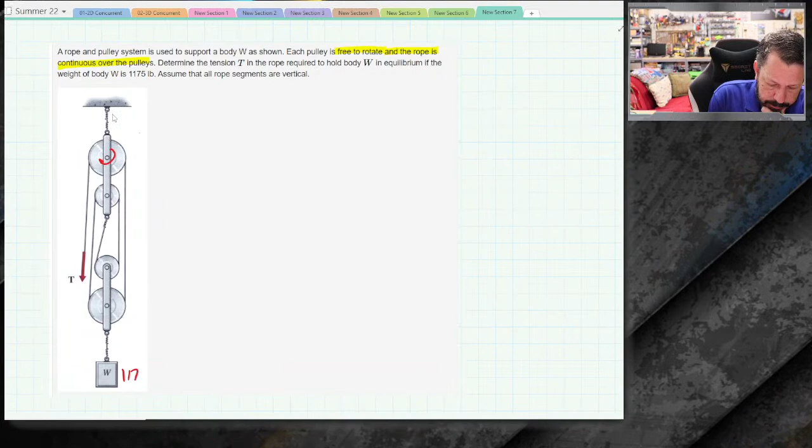So what that ends up meaning with simple pulleys like this is that with no friction anywhere, the rope tension never changes. It changes direction, but not magnitude. For this one, I've got a 1,175 pound block down here being lifted up, and I want to figure out how much tension is in the rope.

So what I do is basically cut through the thing and draw this free body diagram. I've got the little pulley, the bigger pulley, and some rope. They're connected together with a little block.

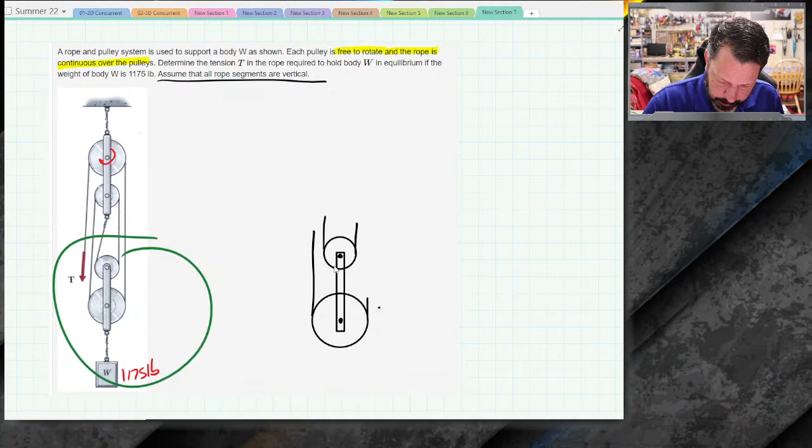And then the rope goes around everything, so the rope comes off here. It does say assume all the rope sections are vertical, so even though this one's drawn kind of angled, I'm going to draw it this way. Comes off here, comes off here. I've got, well, I'm going to put it right here.

1,175 pounds pulling down. I've got tension in the rope here, tension in the rope here, tension in the rope here, and tension in the rope here. So I've got 4 rope tensions all pulling up on this thing. And that I know they're all the same because it's one continuous rope. So it's all the same tension in that rope because there's no friction on the sheave and there's no friction between the rope and the sheave.

Now, if there was friction, this wouldn't be exactly true. The tension would gradually decrease as the rope went around more and more sheaves. But we can just write summation of forces in the y direction equals 0, and I've got 4 T's going up, balanced by 1,175 pounds going down. The tension in the rope is just divided by 4.

293.75 pounds tension in the rope. Oh, 7.5. Correct. All right.

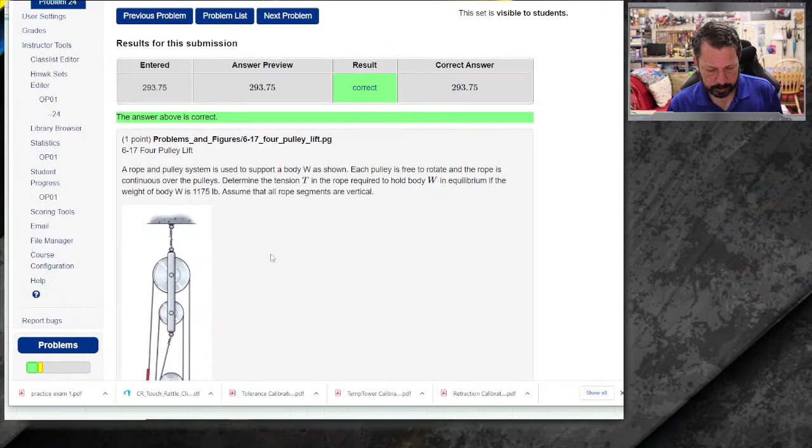So we're not going to have really complicated pulleys, if there's any at all on exam 1. But that's kind of how you deal with them. You just have to make sure that the key is all frictionless, first of all. And then where is this one continuous rope, or are there multiple ropes in there? If it's a continuous rope, that rope has the same tension anywhere you cut it open. And it's all about drawing the free body diagram then.

Let's see, we're getting close on time. This is kind of the same thing. This would be a good one to do for calculating reactions. Just what's the reaction at C? That'd be an interesting one.

It does have these little issues about being mass of kilograms. The other tricky thing on this problem is that it looks like the center of mass of the beam is right at point B, but that's not necessarily true. B is given by these dimensions, A and B, but the center of mass is just A plus B divided by 2. It's right in the middle. And A and B are not the same dimensions, 1.9 and 1.4. So center of mass is not directly under point B, if you want to work with that problem.

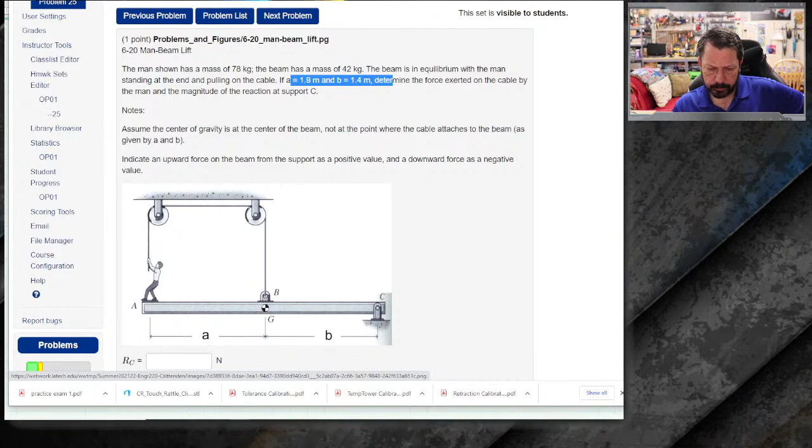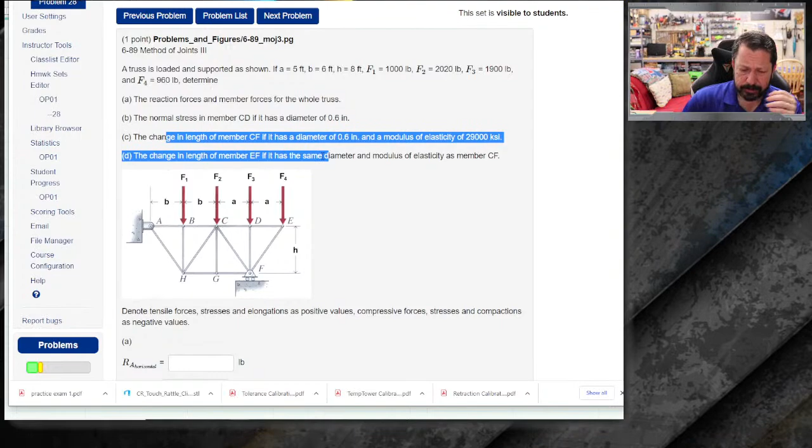These add in the idea that you're also doing stress and change in length in the member after you find the force. So they're combining stress and statics, strength of materials and statics.

This is, I'm not going to work this one, but let's do something with this one just to prove a point, I guess. All right, so this is one of the problems that is good to take a few minutes to kind of plan your solution process. So I've got a 3,000 Newton load right here at some angle, 27 degrees.

And all members are made of structural steel, so I'd have to go look up their material properties from the little reference material. Determine the change in length in members FG, this guy, CD, this guy. Oh, that's it. And they give us our cross-sectional area, so we don't even have to calculate it. It's just given. Then it gives a bunch of lengths.

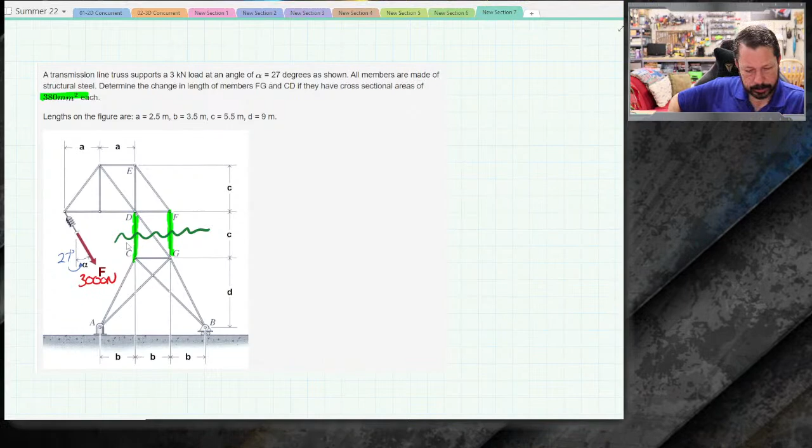So normally what you do with this, you think, oh, it's a truss. I can see that. It's all triangles and everything. There's no forces that are applied directly to the member. They're all at joints. That's all good. I should solve for the reactions at A and B, which is totally fine. But if you look at this one, it's kind of clear that it's setting you up to do a method of section right here, right? You don't need DG necessarily, but you need those other two. And once you look at that, then, well, if that's what I'm trying to do, then I could just skip all the reaction stuff and draw this free body diagram.

Put my 3,000 newtons over here. Put the force here, and force here. I've got 3 unknowns: FG, DG, and CD, along with my 3,000 newtons. And I don't need any of the reactions at A or B because I'm just using the section at the top. Also, this is a zero force member if I needed to know that. That doesn't necessarily help with the problem being asked, but that is a zero force member.

So at that point, you could do summation of moments about D, and you'd find out FG, and then you could do summation of moments about G, and find out CD, and do the rest of the problem. I'm not going to solve that one, but it's good to see where you don't always have to follow the cookbook of drawing the free body diagram, finding external reactions, and so on. You could go that route, but it would take much longer, and you'd have to deal with these weird angles that aren't given. You've got some dimensions, you could calculate them, but you don't need to do all that.

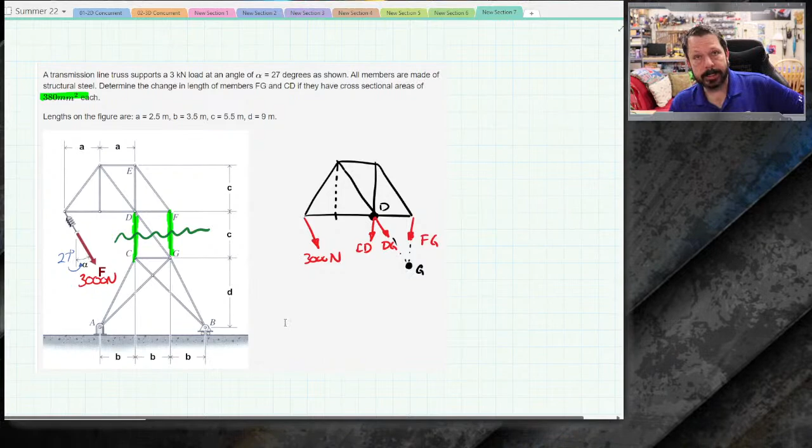Let's see what else. This one's definitely set up for method of sections.

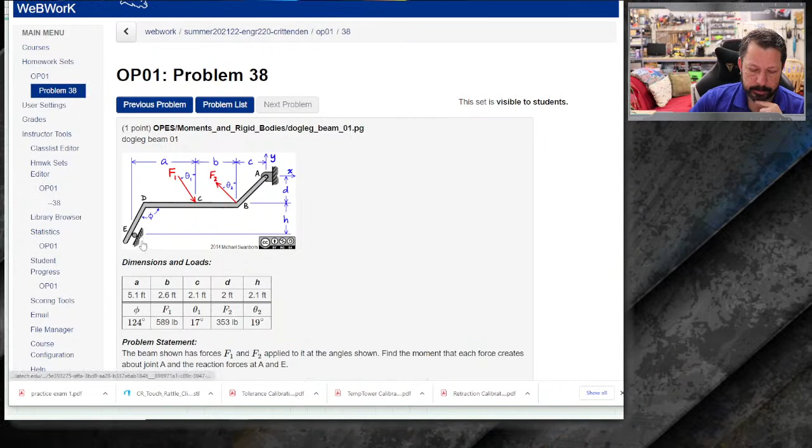That one's more about drawing a good free body diagram. It's a little bit complicated - you've got the one thing over here with the roller not on a flat surface. The roller's on an incline, so the reaction at this roller is perpendicular to that incline. You do have to catch that a little bit. That's probably a little beyond what we were going to do on the exam.

If you want to do some practice exam trusses, these, wherever they are - this one's good, that one's good, and that one's good, and that one's good.